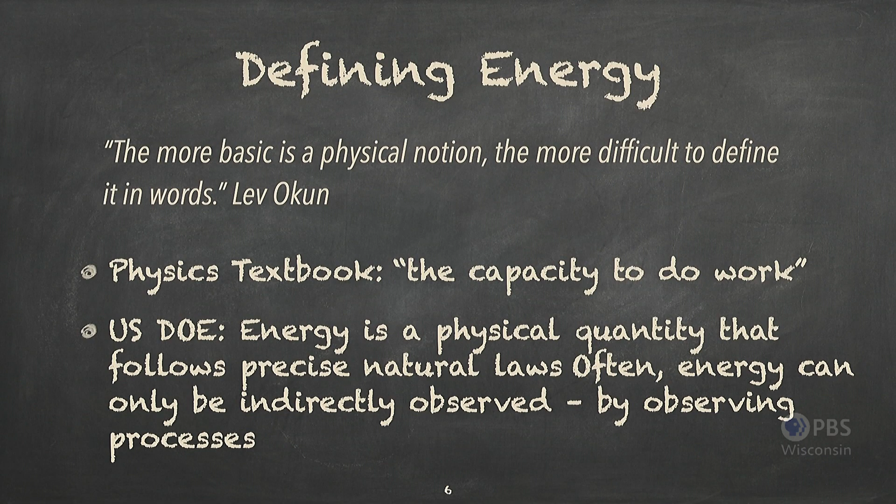The US Department of Energy says that energy is a physical quantity that follows precise natural laws, and that often energy can be indirectly observed by observing processes. Super clear, right? Like a plate of spaghetti? So let's try on our own. Energy has no physical essence. It's not a thing, right? We can't grab a handful of energy. There's no such thing as pure energy, despite what Depeche Mode would have you believe. It's always carried by something, like me, right? I am carrying energy.

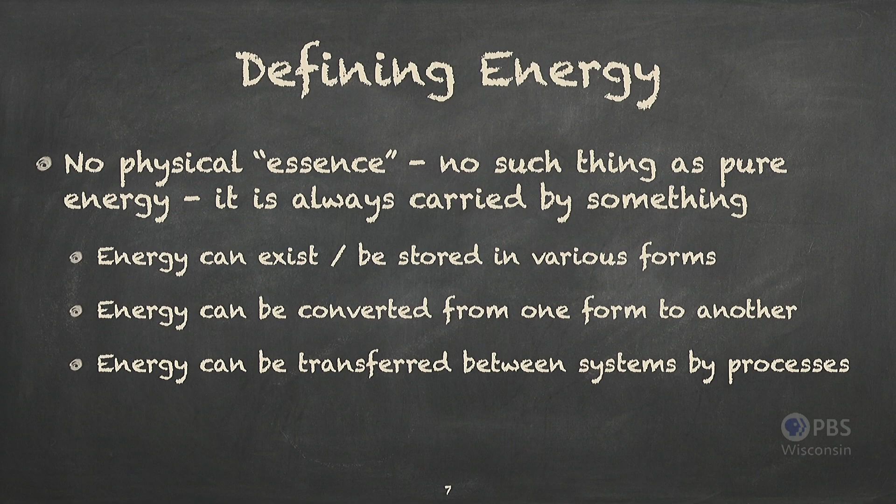Energy can exist and be stored in various forms, and we'll talk about some of those forms. It can be converted from one form to another. I look forward to converting a pizza form of energy into my physical energy later. And it can be transferred between systems by processes. So if I had to come up with a definition of energy, I would say that energy is the ability to create change.

Sometimes it's easier to think about energy in terms of its sources. So sorry if that's a little bit small, but on the left we have coal and nuclear. We have oil, we have natural gas. Then we have some more renewable sources like municipal solid waste and hydropower. And then we have the green power like wind and solar and biomass and geothermal and biogas and biofuels.

And then, as I mentioned, food is also an energy source, right? And the interesting thing about all of these is if we think about what's the one energy source that all these things came from, it's the sun, right? The sun grew the biomass that animals eat, that we then eat as food. The sun grew the biomass that the dinosaurs ate, and the dinosaurs then died and became the oil in the ground and the natural gas. Everything tracks back to one major energy input source to our planet coming from the sun.

Now, energy uses are equally varied. There's my favorite, the nice Ford Power Stroke diesel there. It's a 6.7 liter, in case you were wondering. Wayne Gretzky playing hockey, another fan favorite of mine. My beautiful computer and phone. The electricity that I need to plug those in. Those are uses of fans and hot water heating and all the kinds of uses you use around the house.

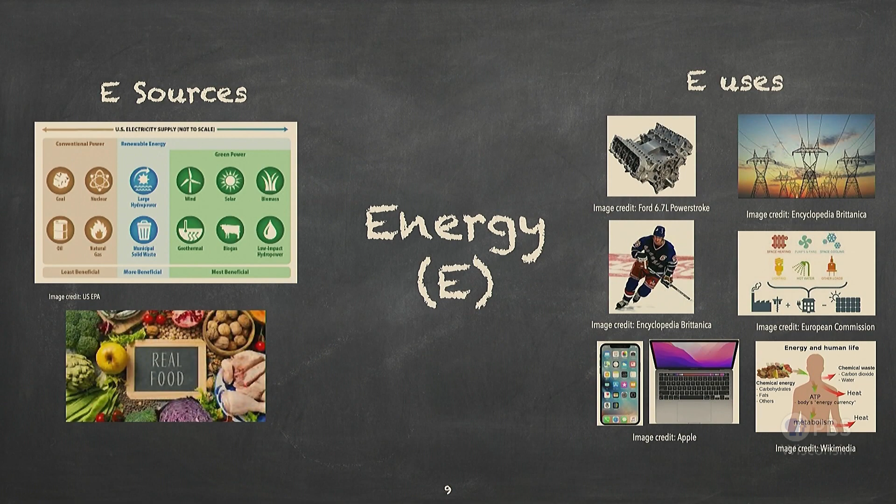And then that last square is energy and the body. The food energy gets transformed into ATP, adenosine triphosphate. See, she said I had a biochemistry degree, which is the energy carrier that you use in your cells in the body. So energy has lots of forms. It has lots of uses. And, for example, you may feel like you can use it up too, right?

With few exceptions, very few, the use of energy, like solar, we're not depleting that, but the use of energy depletes the source. So for example, when you feel like your energy is used up because you've been playing a fantastic game of hockey, or you're exerting yourself, it's because your body is using the energy that you have carried in your blood faster than it can be replenished by your body transforming the food into ATP.

So when we think of energy, right, we tend to maybe focus a little bit on electricity, but it's much, much broader than that. And we can think about it in terms of what its source is, what its use is, and the transformations we need in order to do that. So some of the forms that energy takes, it can be thermal, it can be kinetic, that's the energy associated with motion. It can be potential, so related to the gravitational field, right? If I dropped a ball and it hit the ground, that had potential energy.

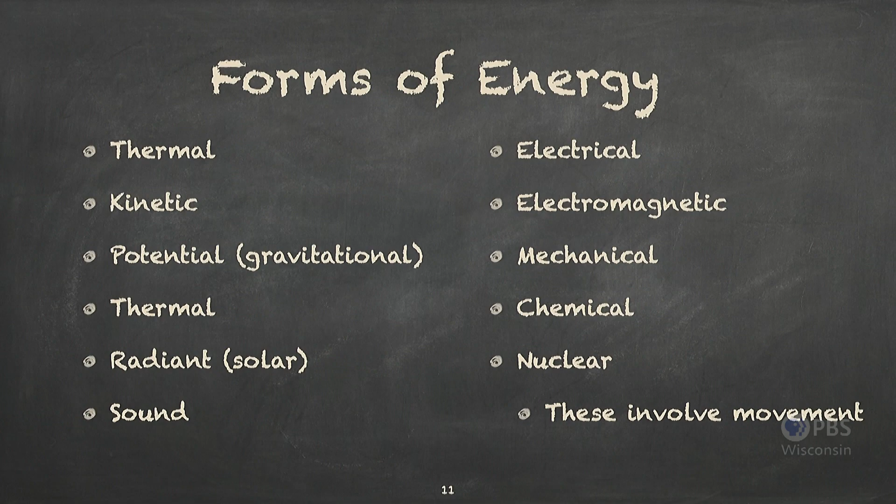Oh, I apparently like thermal so much I listed it twice. Radiant, so solar energy. It can be sound. Sound can be energy waves. And then we have electrical, electromagnetic, mechanical, chemical, and nuclear. And those forms on the right-hand side mostly involve motion, right? Especially we'll talk about electrical energy, right, as it flows through wires. We're talking about the motion of electrons.

So energy can undergo transformations, as I mentioned. So you can go from one form to another. We can turn electrical energy into the sound and light of our TV. We can turn light into the chemical energy stored in plants, right? We can turn chemical energy in batteries into light. So we can do light into chemical and chemical back into light.

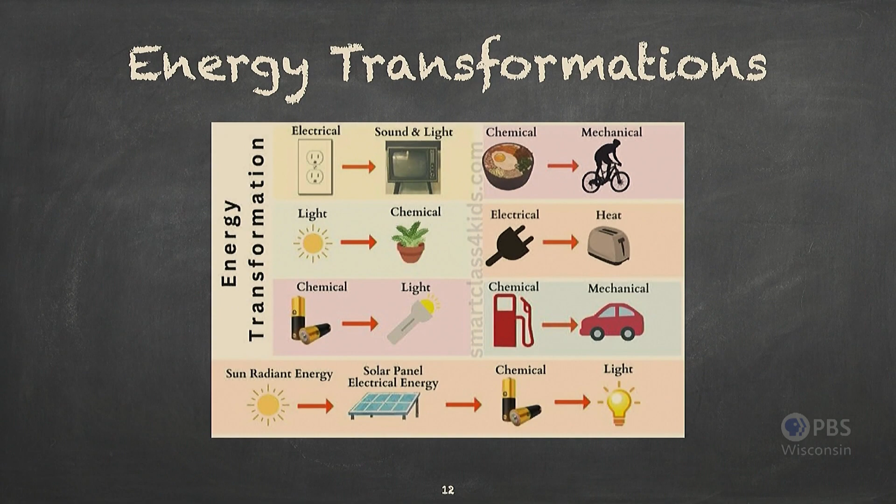We can do chemical, our food, into mechanical energy that we create. Electrical energy can become thermal energy in your toaster. My favorite, chemical energy can become mechanical energy in your vehicle. And that's what engineering is all about. Transferring energy from one form to another to do something useful.

So we also need to define energy transfers. There's two kinds of energy transfer. There's thermal energy transfer, which we call heat. So it is incorrect to say heat transfer. We do thermal energy transfer, and that process is called heat. And then work, which is pretty much all the other kinds of energy transfer. So you can have moving boundary work, paddle wheel work, shaft work, spring work, lots of forms of work.

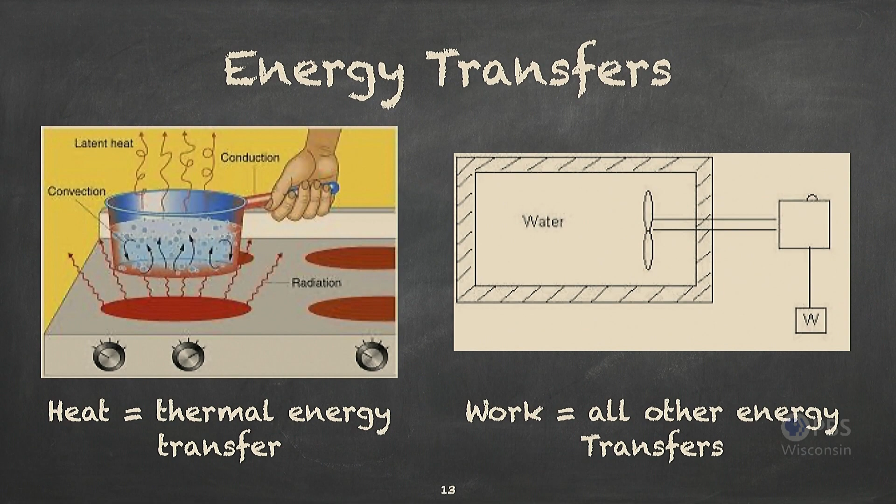And what I always tell my students in thermodynamics is, heat's really easy to recognize. You've got conduction, convection, and radiation. And if it's not one of those, it's work. But these energy transfers require a gradient. They require some sort of difference, right? So for example, in order for thermal energy to transfer, you need a hotter body and a colder body. If they're the same temperature, there's no thermal energy transfer.

So there's always some kind of gradient, some sort of potential difference that's required in order to transfer energy, whether it's thermal or mechanical. Now, the larger the gradient, the faster the energy will flow, and that means more power. And we'll see that in a minute. At higher voltage, more electrical energy flows.

Okay, what about power? Well, talking about transfers also brings in time dependence. We talked about the rate at which things happen, and that's really important. Energy is not the same as power. People use them interchangeably, but they are not the same. Power is the flow rate of energy. It's the rate at which energy is transferred or used.

So you get an electrical bill, but what that actually is is an aggregate amount of the total energy you used, even though you used it at some rate, you used power. So for example, running more apps on your phone requires a faster power draw from your phone, and it'll make your battery die faster because it's more quickly depleting the energy that's stored in the battery.

Now, the rate, by the way, we talked about work transfer. The amount of energy in work at a particular time rate is power. When we talk about the rate of thermal energy, we just say heat transfer rate. So a little bit more straightforward there.

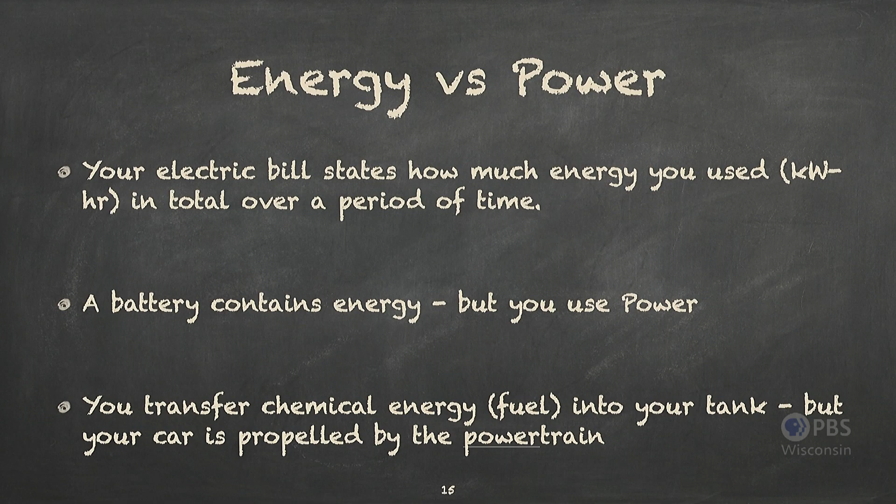So another one, and this is the one that I always use to help me remember, you transfer chemical energy as fuel into your car, but your car is propelled by the powertrain, right? You're drawing it out as power. It's that time rate of energy that you're actually using there.

Okay, so now we've talked about kind of what energy is. It's the power to create change. We've talked about forms that it can take. We've talked about ways to move it around. Now we need to talk about some sort of overarching way of looking at total energy. And that's where energy conservation comes in.

So the first law of thermodynamics was defined in the 19th century by James Prescott Joule, and he was awarded the unit name for doing so. So the SI unit name for energy is the joule. A joule per second is a watt. Not like the Watt brothers that famously all played football here, but the power one.

The first law of thermodynamics says that energy is not created or destroyed. That's the one you're probably most familiar with, right? People think energy is neither created nor destroyed, energy is conserved. That's the first law of thermodynamics.

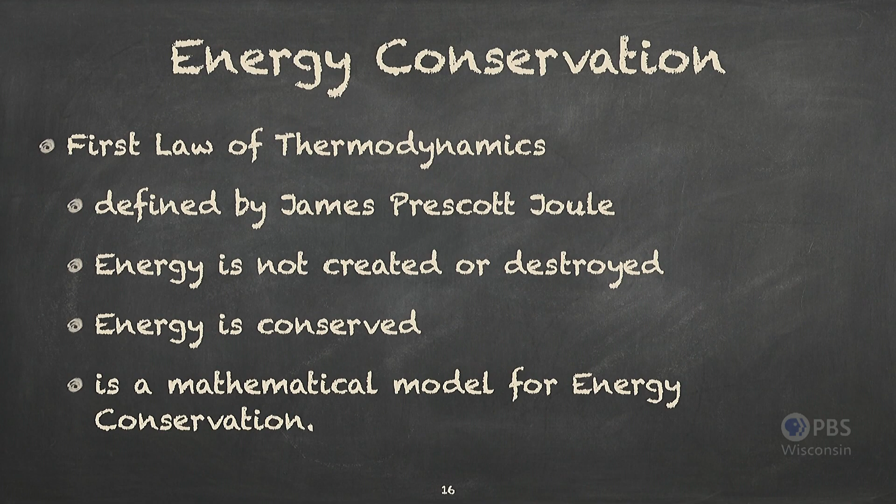And it turns out that the math version of this, which by the way is Mechanical Engineering 361 or EPD 361, shows that it's a mathematical model for energy conservation. So we can use this idea to mathematically quantify transfers and forms of energy. I promise you no math tonight.

I'll keep my word. So in order to look at this, in order to define these things, the very first thing that we have to do, and if you saw my other talk, you saw a version of this slide too, is define the system.

So the system is whatever we want to study, right? It can be my cell phone, it can be my computer, it can be an apple, it can be a can of Diet Coke, doesn't matter. Whatever we want to investigate, that's our system. The surroundings is everything else. So anything not in the system is in the surroundings, and the defining line between the system and the surroundings is what we call the boundary.

Transfers of energy are defined at the boundary. So when it crosses from the system into the surroundings, that's a transfer. When it crosses from the surroundings into the system, that's a transfer. Within the system, there are no transfers. Within the system, you have forms. So the forms exist within the system, and those amounts change due to the transfers.

So the first law of energy conservation says in all that the sum of energy transfers into and out of the system are equal to the energy changes held within the system in its various forms. So this would have been math, but I changed it into words for you.

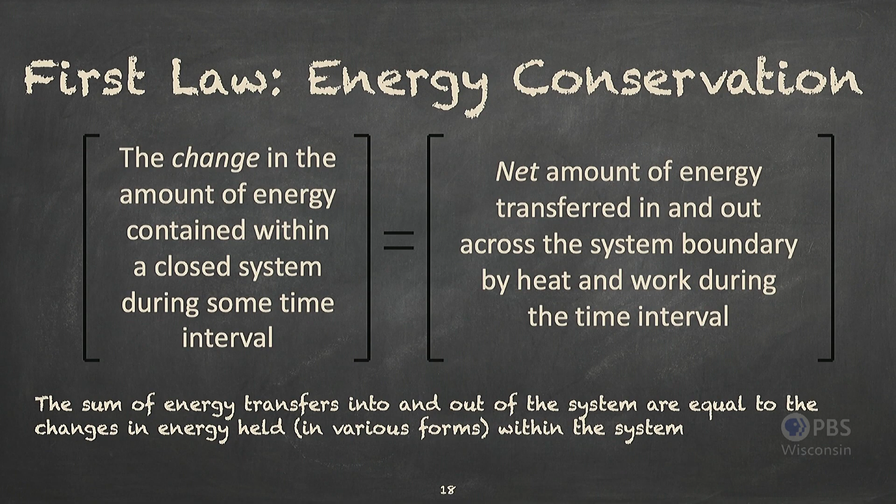Now this is in a closed system, so if we're looking at something where there's no mass going in and out, because mass also carries energy, we can also look at it for processes which occur at a rate, and then all you have is the time rate of change of the energy is equal to the sum of the transfers in and out and changes of energy held within the system. So that's going to be important.

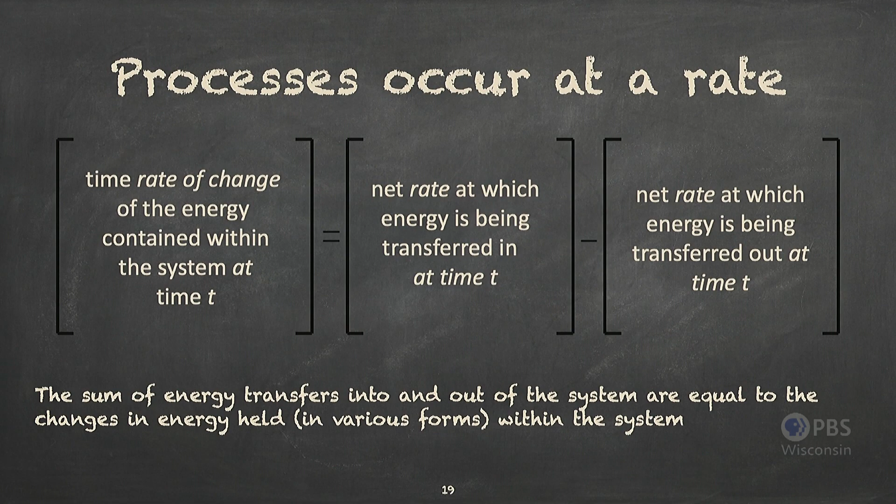We're going to talk about this because what we need to take away from this is that transfers of energy in and out, it's kind of like your bank account, right? You get deposits in, you take withdrawals out, and what that changes is the balance of money that's in your bank account. Same thing works for energy.

My dad's an accountant, so he probably really likes that analogy.

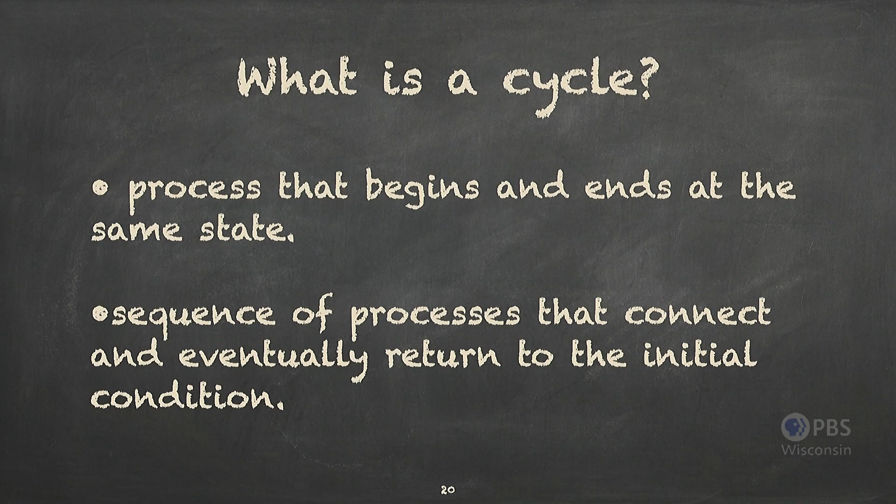Okay, the other thing we have to define just briefly is what is a cycle? A cycle is any process that begins and ends in the same state. So if I were to walk all around this room and end up right back exactly where I am now, that's a cycle. If I take 2 steps there and 2 steps back, the exact same space, that's a cycle. If I take 2 steps that way and then 4 steps over there and then 6 steps back and then come back to where I am, still a cycle.

Cycle has to be at least 2 processes, can be many, many more. But it's a sequence of processes that are connected and eventually return to the initial condition. And that's important because that's how we make power. We generate power, energy delivered on a time rate, by doing power cycles.

So what we have is we have some sort of hot body. That hot body can be burning fossil fuels. It can be coal or natural gas. It can be burning biomass. It can be burning gasoline in an engine. It can be a nuclear reaction. It can be solar energy. And then there's some sort of system it's transferred into.

Process takes place. Power is generated. That can be electricity through a generator. It can be shaft power to move a vehicle. It could be jet engine thrust. And then whatever energy didn't get turned into power gets rejected to generally the atmosphere. So that's either through a cooling tower if you're at a power plant, or through your exhaust pipe if you're looking at an engine, or maybe into water, a lake, a river, an ocean. Often power plants, right, send their effluent water out into the lake.

So you're taking energy in, you're converting some of it to power, and the rest is going out to some lower temperature source. This sets up what I really want to talk about, which is the idea of efficiency. When we define efficiency of any energetic process, what we're interested in is what we want, so usually power, over what we had to do to get it.

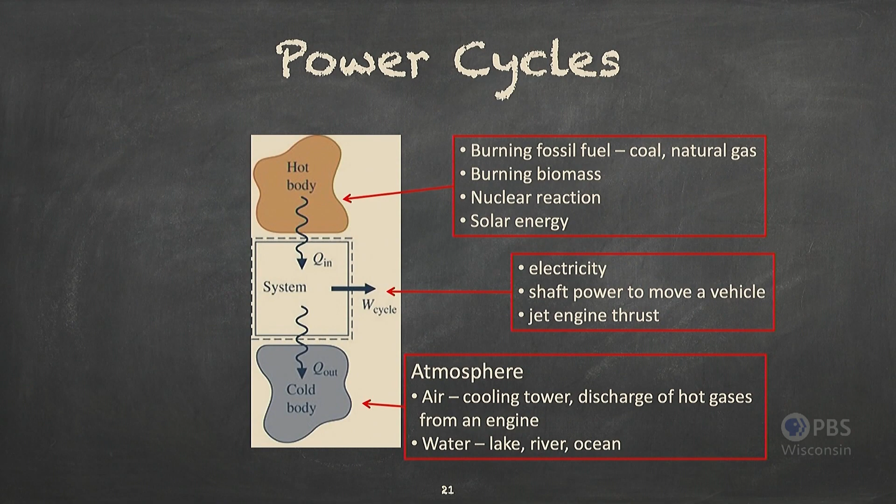And going back for a second, that was that hot body work, right? That's what we had to do to generate the power. We had to use a nuclear reaction, we had to burn something, but it's the power coming out that we want over what we had to put in to get it.

So this idea of thermal efficiency is based on the conservation of energy, assuming that work and thermal energy transfer, or heat, are interchangeable, and they are. Transfers can become transfers, transfers can become forms, forms can become transfers. And the theoretical limit, based on the conservation of energy, is 100%.

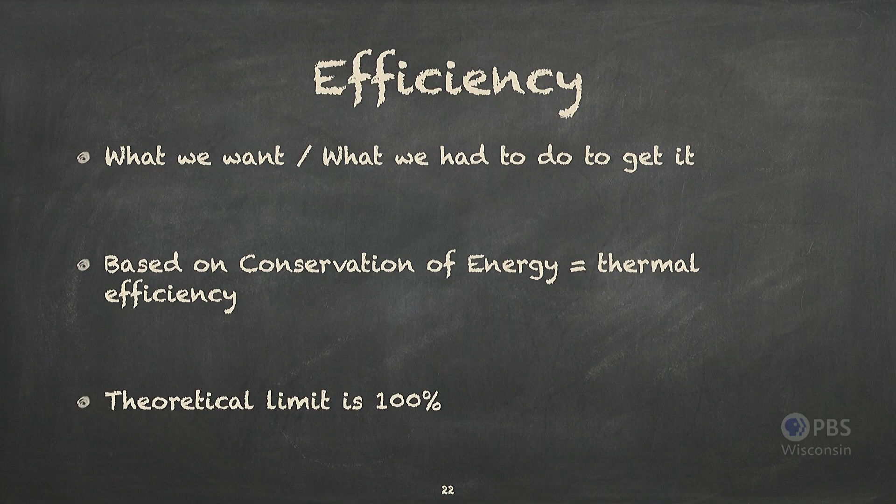But we know that's not true. We know that we're not going to get 100% out. And that's the beginning of the limitations of the first law. So the first law does not tell the whole story when it comes to energy. All energy is not equal. There is something that we call the quality of energy.

So you can do more with high temperature heat than you can do with low temperature heat, right? If you have a thermal source that's at very high temperature and you have one that's at like low temperature, you can do a lot more with this one, right? We know these things instinctively, even if we don't know them formally or mathematically. And so all energy is not equal.

Energy has different quality. The first law is also missing the ability to tell us which way a process will go. Now again, you know this, but the first law doesn't tell me if I have a hot cup of coffee out on this table, will it get hotter? That's possible by the first law. Or will it not? Will it get colder? First law doesn't tell us that.

And the first law also doesn't describe the lost work potential of energy. So when you have energy and you don't turn it into work, that's a real bummer, right? That's lost work potential. And that is something we have to find another way to get to. So when we talk about the quality of energy, as I mentioned, all energy sources are not created equal. Work and heat are not equal.

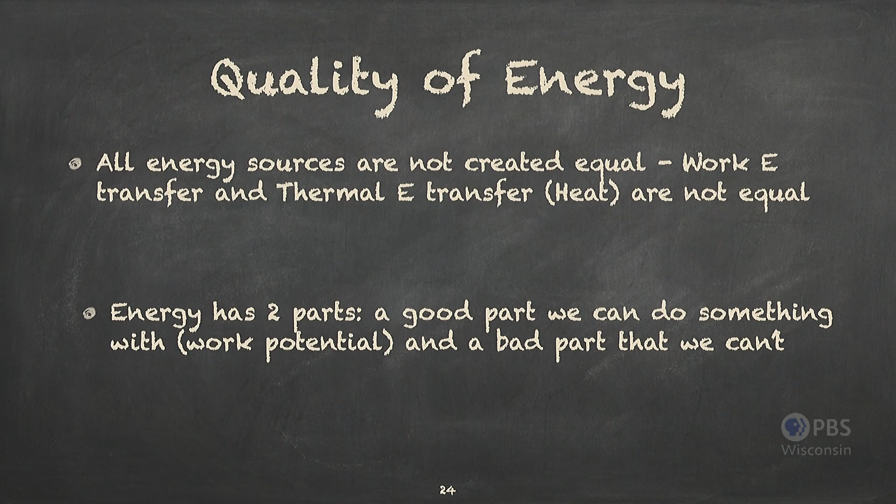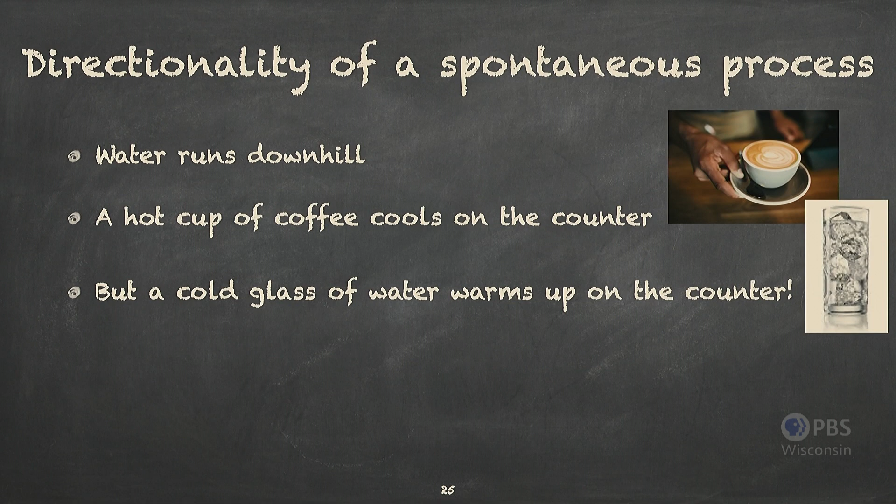So we also talked about the directionality, and I will tell you about that in just a minute. The directionality of a spontaneous process. Well, you know, water runs downhill. A hot cup of coffee on the counter gets colder. But a cold glass of water on the counter warms up. So wait a minute, we just said the hot cup of coffee gets colder, but the cold thing warms up. That seems counterintuitive, but you know, because you've seen it, that that's exactly what happens.

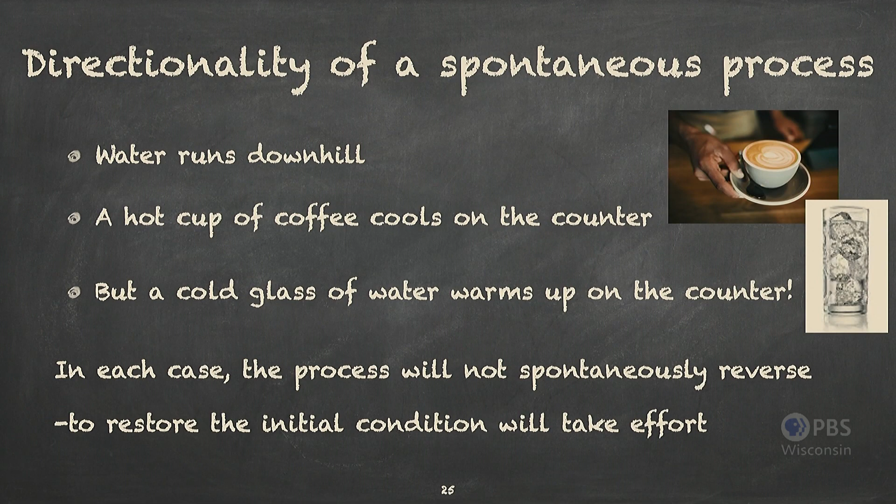In each case, the process also will not spontaneously reverse itself. My hot coffee that has gotten cold requires the microwave to get it hot again, right? To restore that initial condition takes effort. You know this, you see this all the time. Even if you couldn't mathematically put numbers on it or put a name to the formalism, you know this from your lived experience. You really know more thermodynamics than you think.

So work potential, let's talk about that for a minute. When a system is not in balance, which our fancy word for is equilibrium, with the surroundings, a gradient exists. And remember, it takes a gradient to do transfers. And work is a transfer. So if a gradient exists, we have an ability to do work. The potential to do work is called availability, or exergy is the other name for that. And that's the good part of energy.

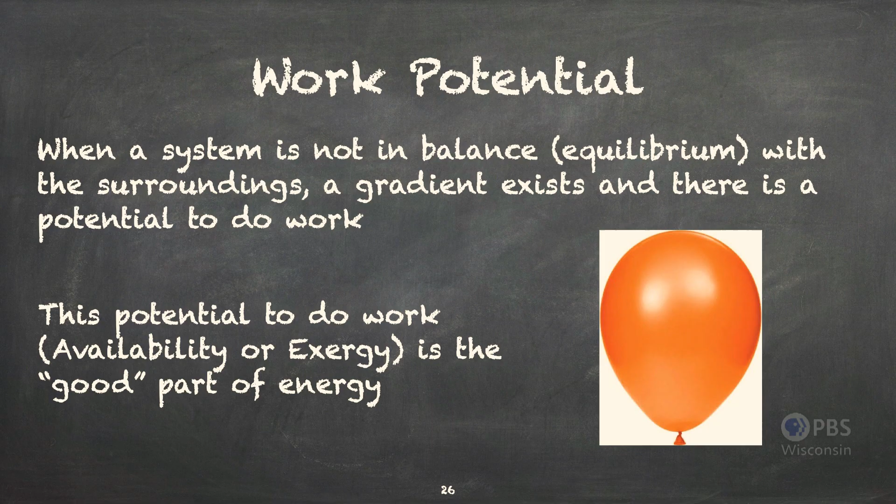So here I have a balloon. The balloon is expanded. That balloon has the potential to do work. We could untie the balloon and blow that air at something and do some work, probably some moving boundary work. But while that balloon exists, while that air is in the balloon, while that air is pushing against that boundary, that balloon has the potential to do work.

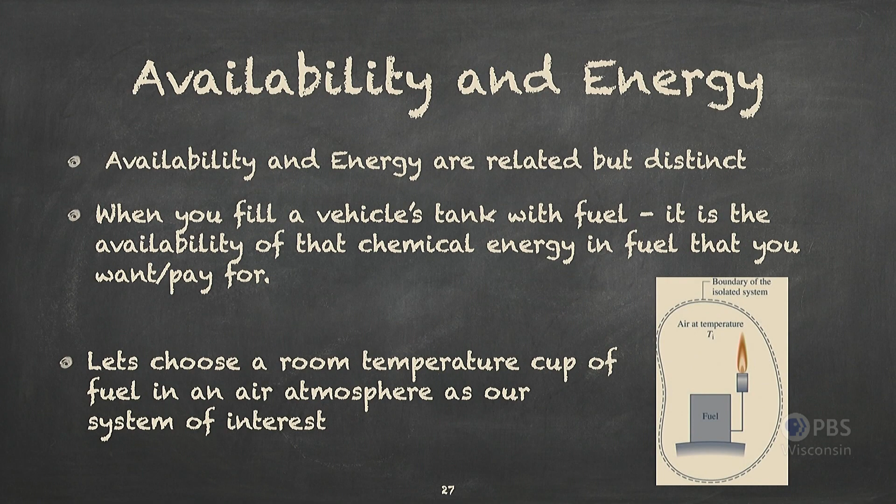Now, availability and energy are related, but they are distinct. When you fill a vehicle's tank with fuel, it's the availability of the chemical energy in the fuel that you want and what you pay for. So let's choose a room temperature cup of gasoline in an air atmosphere as our system of interest. So I have a cup of gasoline. We're imagining this because obviously it's not a great idea to have a cup of gasoline in this room. We have a cup of gasoline in an acrylic box filled with air.

And that's our system of interest. Right now, that gasoline has value, right? We know it's probably $3.59 or whatever a gallon, right? We know it has value. But then suppose we burn that fuel, so now we're left with a slightly warm mixture of air and combustion products. And it's only slightly warm because there's a lot of air compared to a little bit of gasoline, right? And so the temperature of the air now is slightly warmer than it was before.

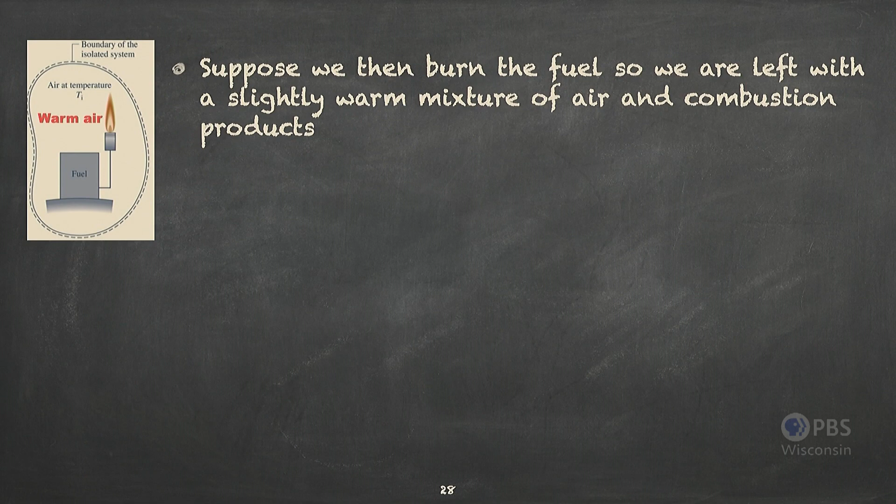The energy in the system will have remained the same. Because the box is constant and none of it has been transferred in or out, none of it left, energy is conserved. However, we've lost the work potential of the fuel. It's been spent. It turned into thermal energy. So that's the difference between energy, still the same, and availability or work potential that has been depleted.

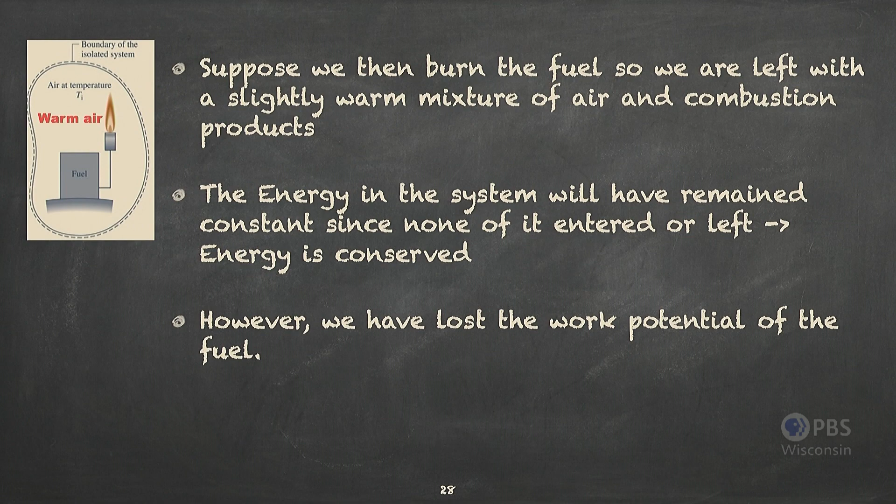So we need a way to quantify that lost work potential. If we don't exploit the process to develop work, that is lost irrevocably. So I just burned that imaginary gasoline and air, and I made warm air, and it's gone. And we're never getting that back. So for example, if I take my balloon and I pop him, no more work potential, and we can't get it back, right?

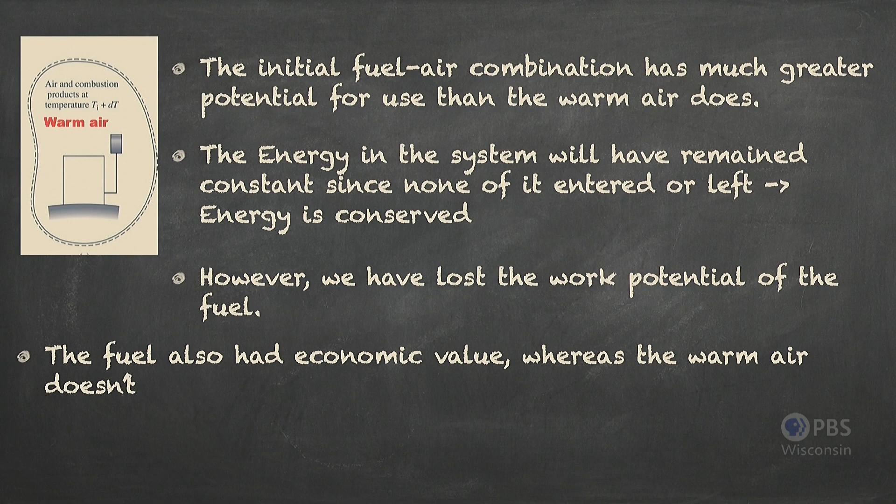So if we think about it, the initial fuel-air combination has a lot greater potential for use than warm air does. The energy in the system will have remained constant, so the energy is conserved. However, we lost that work potential of the fuel. We can't use it in a car instead. And the fuel also had economic value, whereas warm air does not, right? Or we'd be really cleaning up with what's outside right now.

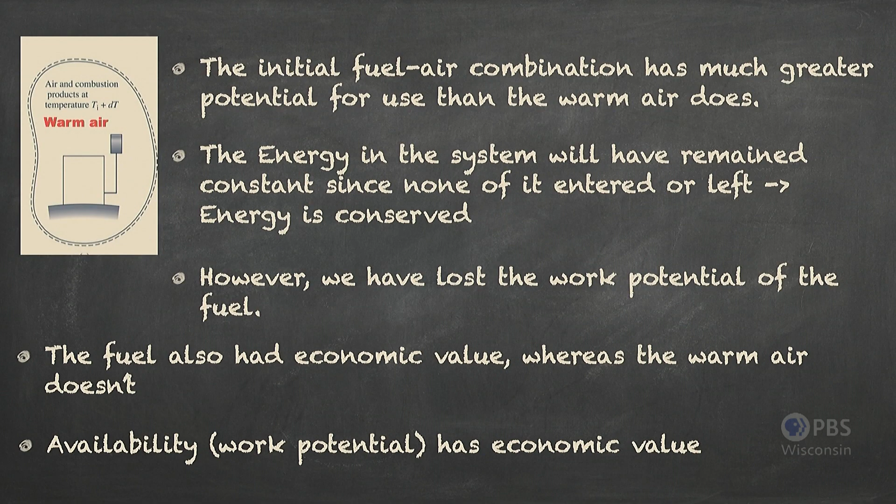Availability, work potential, has the economic value. That's what we care about. So when I say energy has two parts, it has the work potential, that's the part we care about, and then the bad stuff. We're gonna get to that in just a second. The work potential of energy is what we pay for. That's why we pay for electricity. That's what we care about, right? So, I'll save my question for just a minute.

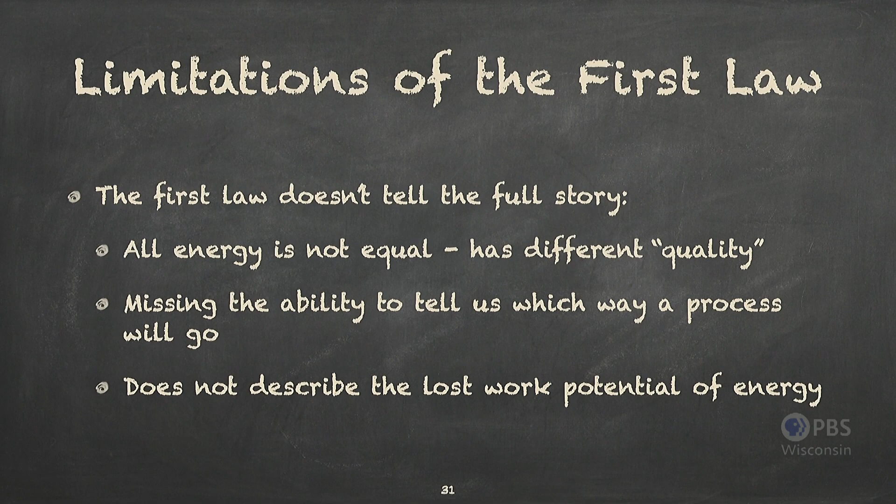So the limitations of the first law, it doesn't tell the whole story. All energy is not equal, and the first law treats it as such. It's missing the ability to tell us which way a process will go, and it does not account for that lost work potential of the energy. So that's why we have the second law.

The second law of thermodynamics is what tells us the direction that a process will take. It'll establish the conditions for equilibrium so that we know if work potential exists and when it's used up. It'll help us to determine the best theoretical performance of cycles, and that comes in handy later, you'll see. And it also gives us a quantitative way for evaluating the factors that keep us from attaining the best theoretical performance. And that is through defining a property that you've probably heard of called entropy.

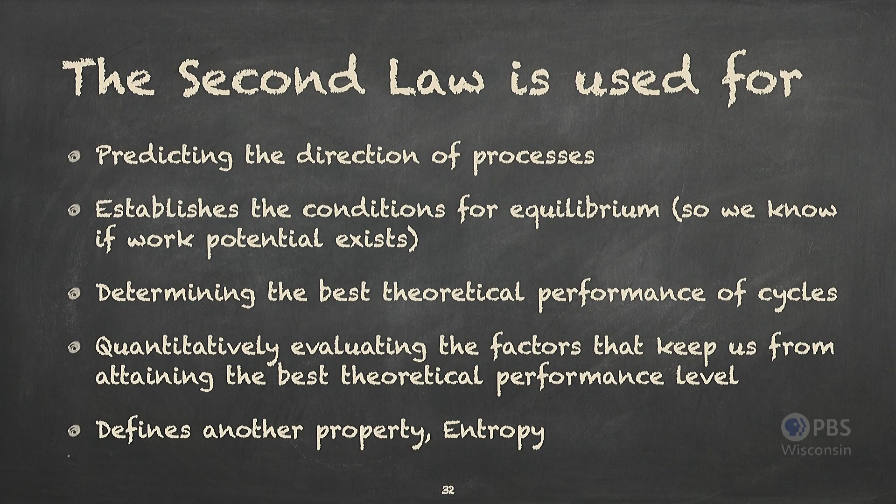What you probably already know about entropy is that the entropy of the universe is always increasing. A physics book will tell you that entropy is the measure of a system's thermal energy per unit temperature that is unavailable for doing work. Well, if energy is the capacity to do work, and entropy is the part of the energy that's not available to do work, we're starting to tease this out here. But entropy is that bad part of energy that I mentioned. It's the part that we can't do anything with.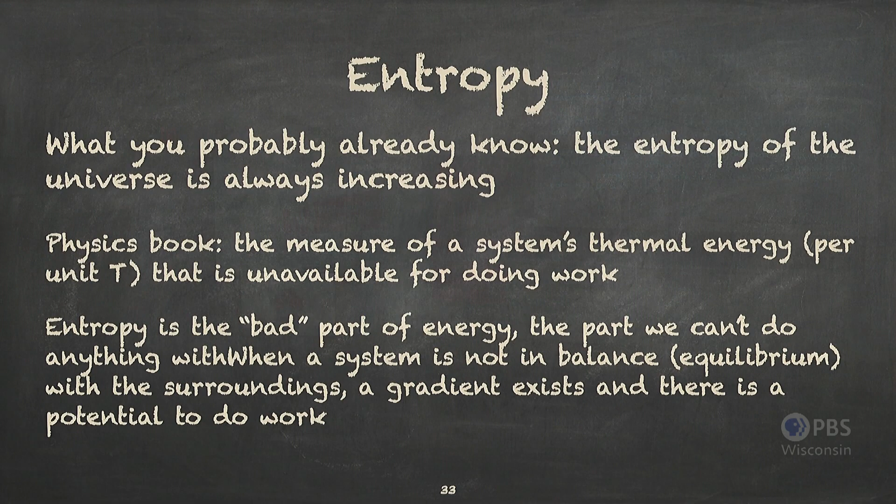When a system is not in balance with the surroundings, a gradient exists and there's a potential to do work. And when that work is done, we've either gotten some work out of it, and what was left over is the entropy. So how energy is conserved, but we still need to turn the lights off, is because energy is two parts. The good part, availability, that's what we pay the power company for, and the bad part, that's entropy.

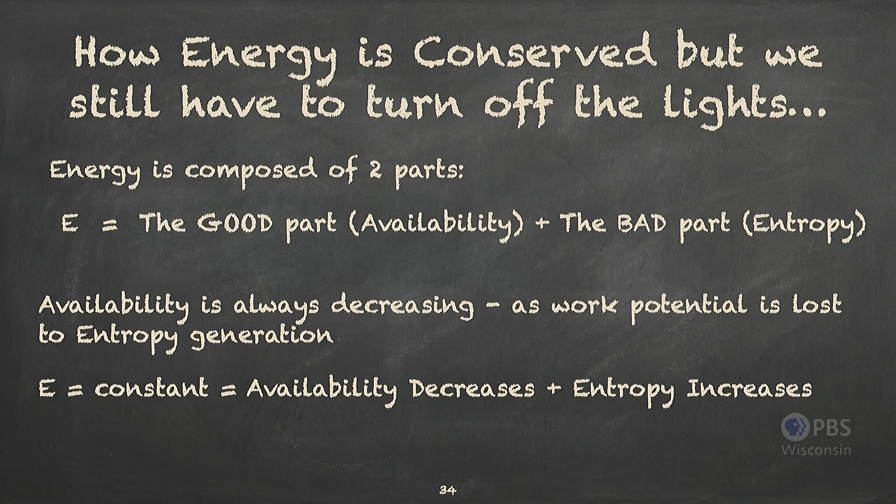And the fact is, availability or work potential is always decreasing. Every real process we do degrades that work potential. So when we transfer energy from the power plant to your home, we've degraded it. It's not all still available for you to do work. What MG&E generates is not 100% used by all of us out here. A lot of it gets lost to entropy generation that happens as it gets transmitted over the lines. When you use it to charge your phone, more of it gets degraded.

Availability, or the potential to do work, is always decreasing, and that work potential is lost to generation of entropy. So you're right, the entropy of the universe is always increasing, and that's because the work potential of the universe is always decreasing. So we hear people talk about happy thoughts like the eventual heat death of the universe. That's where it comes from. Eventually, we just use up all the work potential, and all we have is the chaos and the bad part.

Energy stays constant because the availability decreases and the entropy increases, keeping the total energy constant. So, when you're a kid and you hear, turn off the lights, save energy, right? Or we're having a brownout to save energy. And then you're like, wait a minute, the first law says energy is always conserved. We don't really mean save energy. We mean save work potential, save availability.

So how does that work potential become the chaos that is entropy? Well, it happens through real processes that we call irreversibilities. That's things like heat transfer, friction, chemical reaction, unrestrained expansion, electric current flow through a resistance like a wire. All actual processes involve effects such as these, including naturally occurring processes and ones involving devices we construct, from the simplest mechanisms to the largest industrial processes. This is why we can't ever reach 100% efficiency. These real irreversibilities exist, and this is why. And it's a bummer.

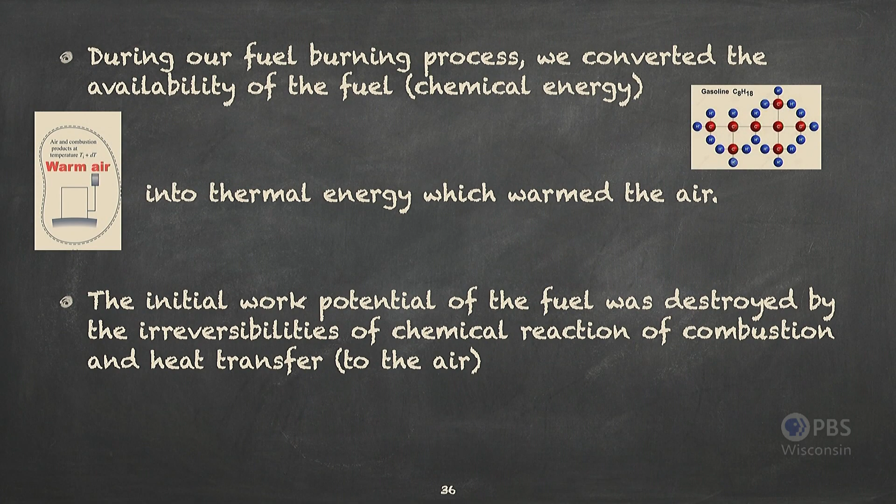Now, there are serious implications to this, right? The implications are that real processes, like power plants or my beloved engines, operate at a lower efficiency than the maximum because of the irreversibilities that exist. We want to try to minimize the existence of these irreversibilities in processes. We reduce friction by using lubricating oils, for example. But they will always be there. We can never get rid of friction completely, right?

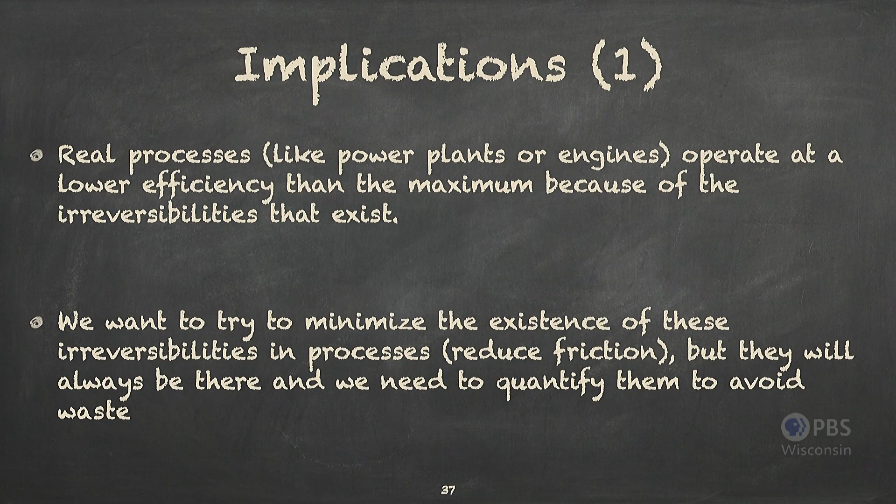We need a temperature gradient in order to do heat transfer. We want to do heat transfer in order to make our power cycles go. So we can't avoid doing the things that are these irreversibilities. And we have to quantify them if we want to avoid waste. You can minimize these irreversibilities. You can target them. You can add lubricating oils to reduce friction. You can lower the temperature gradient in the case of heat transfer. You can lower the resistance of a wire to help the electricity flow. So it's important that we have a way to quantify them.

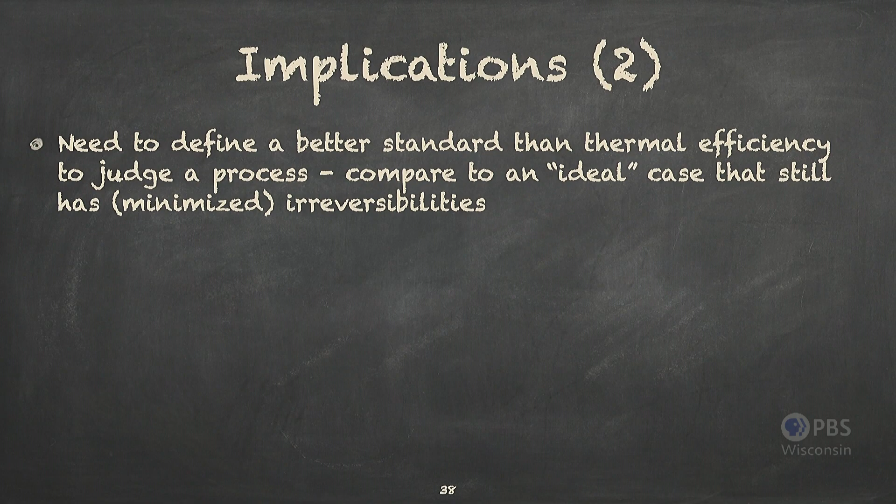The other implication is that we need a better standard than thermal efficiency to judge processes. If work and heat are not equivalent, then how can we be judged on how much work we can provide from heat? So we need to compare to an ideal case that still has real irreversibilities, but they're minimized. You probably see that on some appliance you have at home. That's what these ENERGY STAR ratings are. They're what's called a second law efficiency. They're comparing your real device to the best possible that device could do. In the ENERGY STAR ratings, it's compared against the most efficient water heater or whatever.

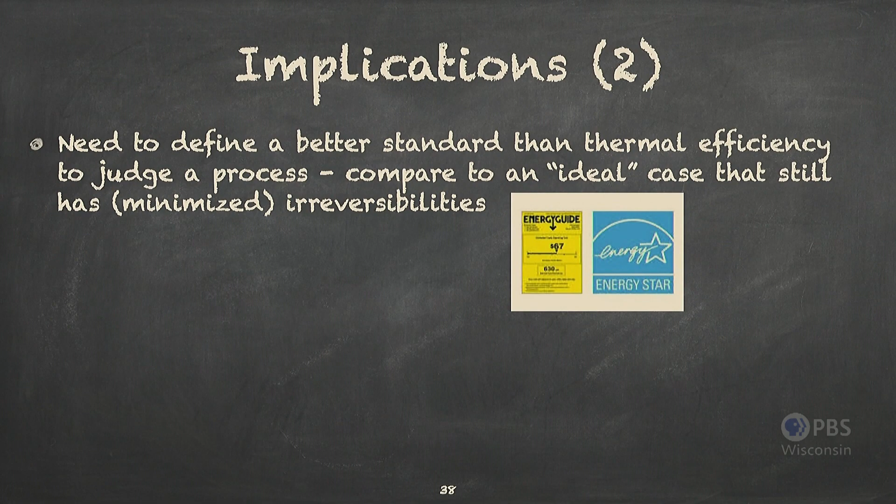But second law efficiency says, wait a minute, we know that energy is not equivalent. We know that real things like friction exist. And therefore, the second law efficiency of any process is always going to be higher than the first law efficiency of it, because it's sort of curving, based on reality. We wouldn't send a kindergartner in to take a college-level thermodynamics exam, right? That doesn't really make sense. We would want to curve the grades based on how the best kindergartner did. We want to compare apples to apples.

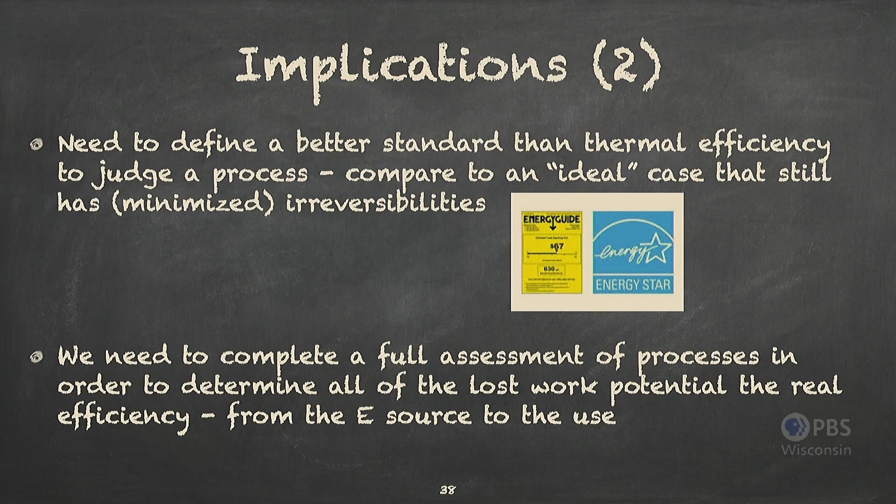The other thing we need to do is complete a full assessment of processes in order to determine all of the lost work potential and the real efficiency, and that means starting from the energy source to the end use, okay? That's life cycle assessment. Life cycle assessment from an energy basis evaluates the total benefits and burdens over the entire life cycle for a product or process. We often say from cradle to grave.

And what that means is from getting the energy resources, from mining the coal, to processing it so that it can be burned in the power plant, to the use phase, to transporting that electricity to your house, to you using it in your coffee grinder, to the eventual disposal and any recycling that might happen.

And so those are more for manufacturing processes, right? So you can think about if you're going to make a car, you've got to go mine the ores for the metal body, and then you have to process them and make it and then transport the car on one of those really scary car carrier trucks to your house. And then at the end of the life of the car, after you've put your 250,000 miles on it, how you recycle those parts.

So why is energy literacy so important? Well, it's so we can do that life cycle analysis, but the real reason is because this is the most important system. We live in a system. There's energy coming into our system from the sun, and everything we do is changing the work potential that exists

within this system. We have to understand energy forms and transfers and how to evaluate these things so that we use the resources, the finite resources, within this system wisely and minimize the destruction of work potential and transformation into entropy. You need to be able to evaluate information critically, right?

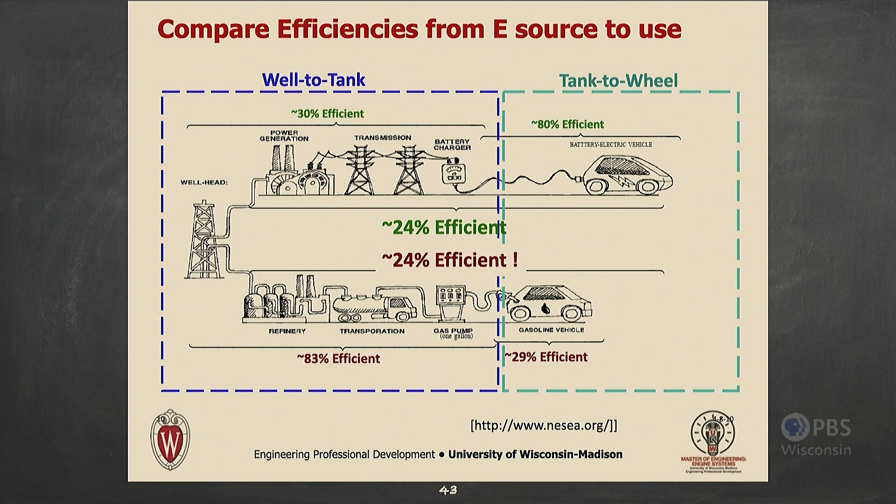But overall, because efficiencies are multiplicative, that 30% times 80% gets you to 24%, and the 83% times 29% gets you to 24%. And they're honestly not that far off when you compare the entire life cycle. This is why we have to be careful and critical about what we read.

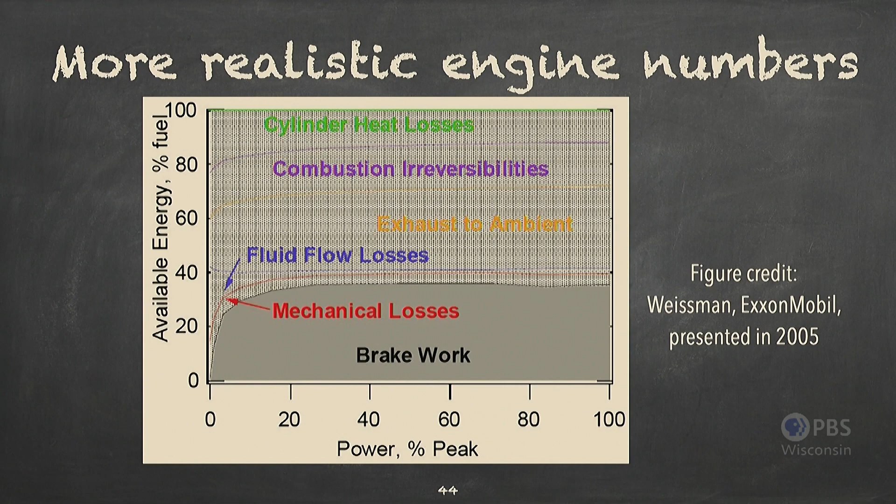So again, I think it's a matter of understanding what's there, the energy sources, the energy uses, the energy transfers, the energy forms. Understanding that while energy is conserved, that's total energy. And the good part of energy, the availability, the work potential, is always decreasing. And it's decreasing because of those irreversibilities that generate entropy. And we can do a lot to minimize them, but we can never get rid of them.

And we should use that knowledge to do really good matching of energy source to end use. We should use that knowledge to minimize the availability destruction that we have, that loss of work potential, and minimize the entropy generated. And we should use that knowledge to critically evaluate graphics or news stories or things that we see where people aren't showing us the full picture.